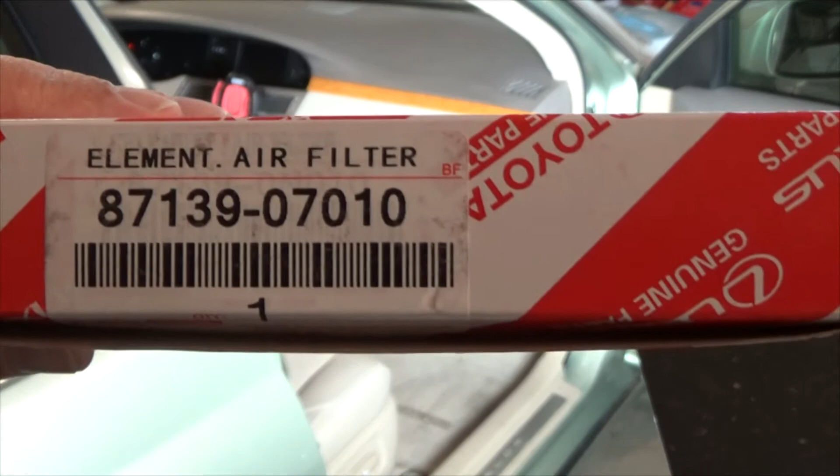87139-07010. Alright, well, I hope it's not a fake one. It says made in Japan. Kind of was expecting made in Taiwan, that's where the oil filters are made.

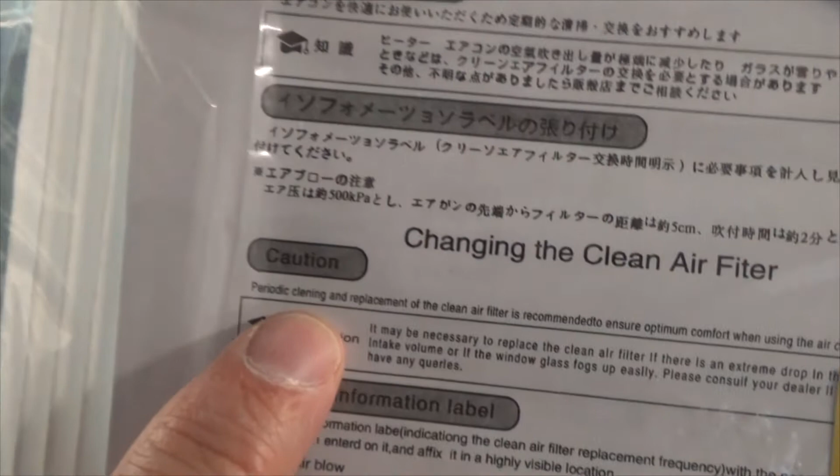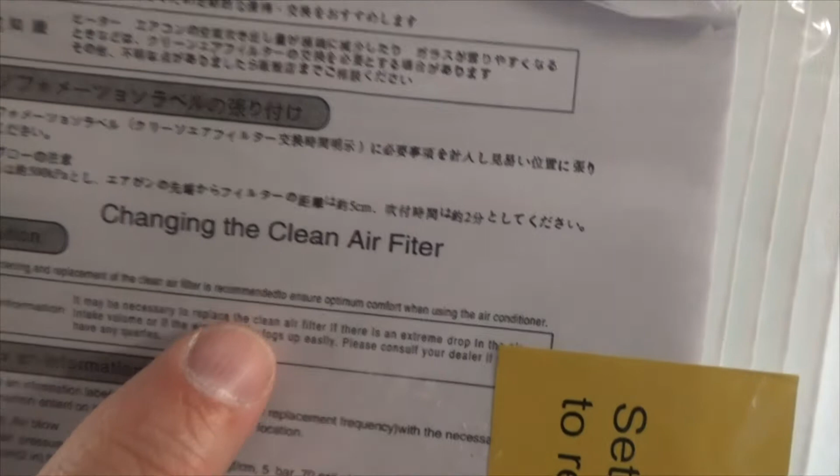But I started to read the instructions, even though I'm a guy and I'm not supposed to. And if you look right here, 'periodic cleaning' - can you see that? It's misspelled. And then 'recommended to,' there's no space there. 'Recommended to' is all one word. So if this is a real Toyota product, bad on them.

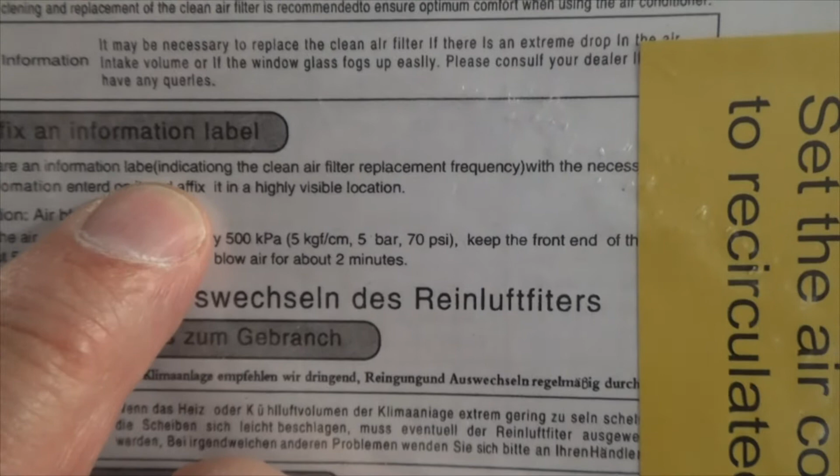Prepare an information label - the L in label before the parentheses is missing. 'Indicating' is misspelled. Oh, this is all bad. This is really bad. Well, I hope it's a genuine filter. Man, that would really suck if I bought a fake one.

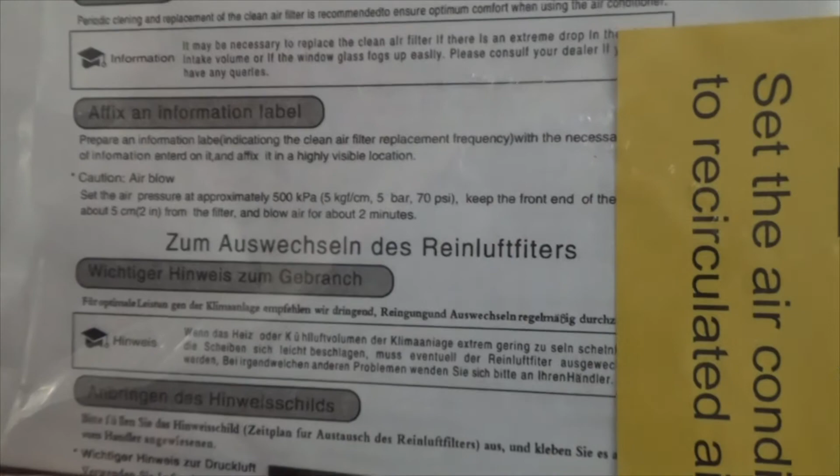Well, I'm going to install it nonetheless. So here we go. I mean, it did come with the labels. And that's supposed to go on the driver's side door by the tire pressure thing. At least that's what the manual says.

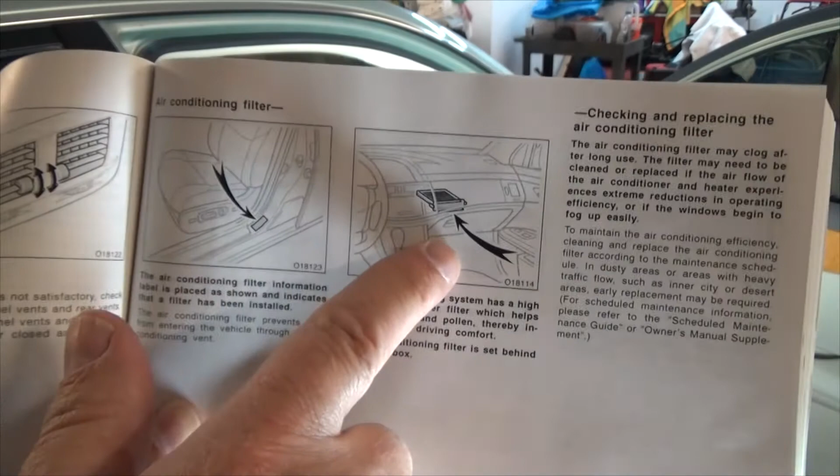So if you look on the manual, it tells you to put the label right there. Then it shows you where the air conditioning filter goes - they call it the air conditioning filter. Then it says, hey, you may need to replace it more often if you notice a reduction in airflow.

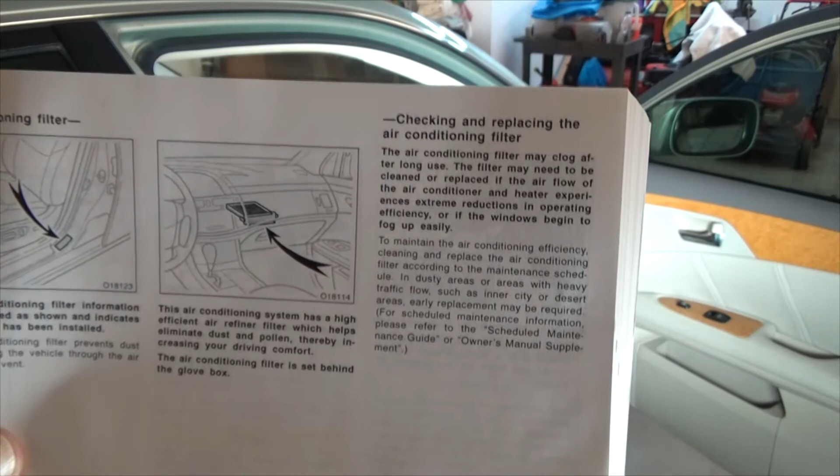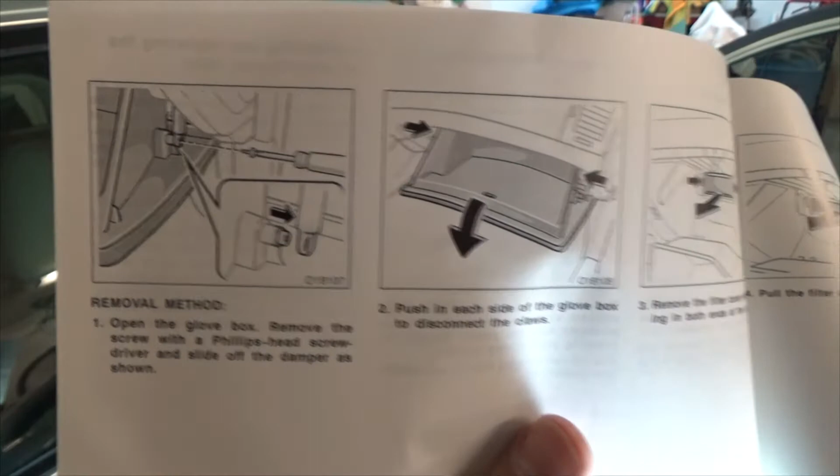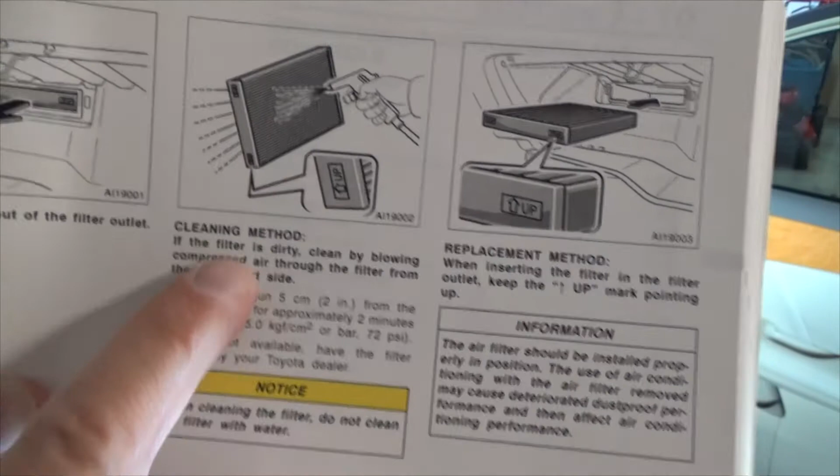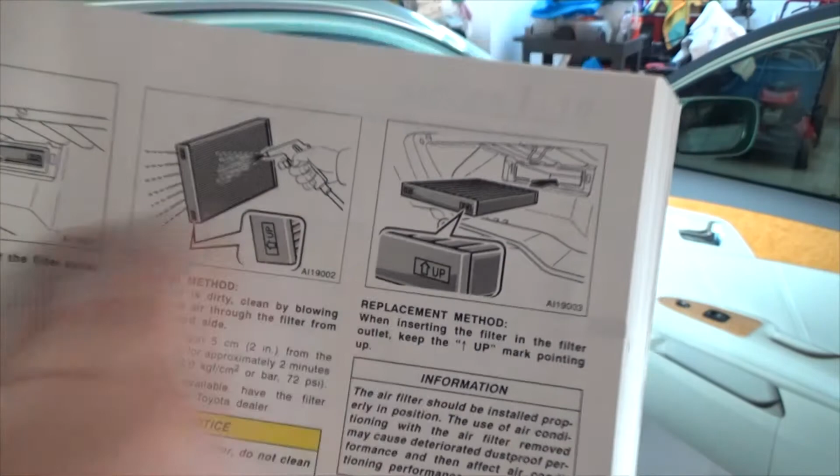Then in your manual there's instructions on removing it, tells you how to do it, and I'll go over that in the video. Alright, now we're going to be pulling out the factory filter, but it doesn't even say replace - after it says pull it out, it tells you to clean it, and it tells you how. If it's dirty, clean by blowing compressed air through the filter from the downward side, and it shows you the up.

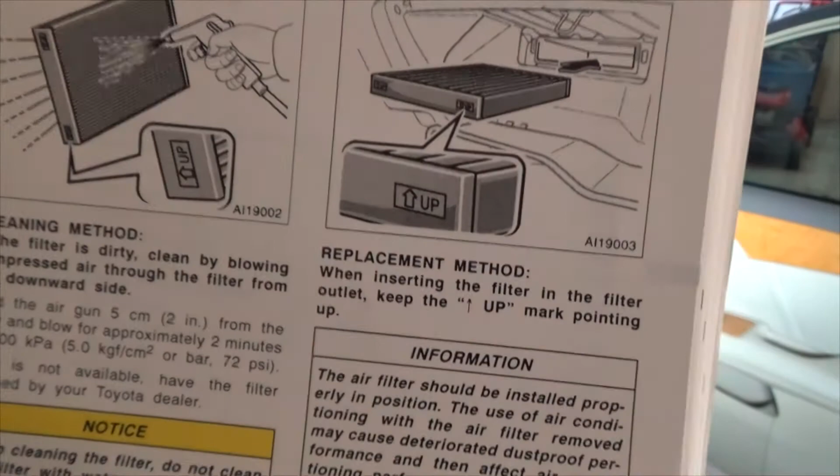So you're going from the clean side and you're blowing out the dirty side. Do not clean with water. And then it says when you replace it, up is up, so be sure the up arrow is pointing up.

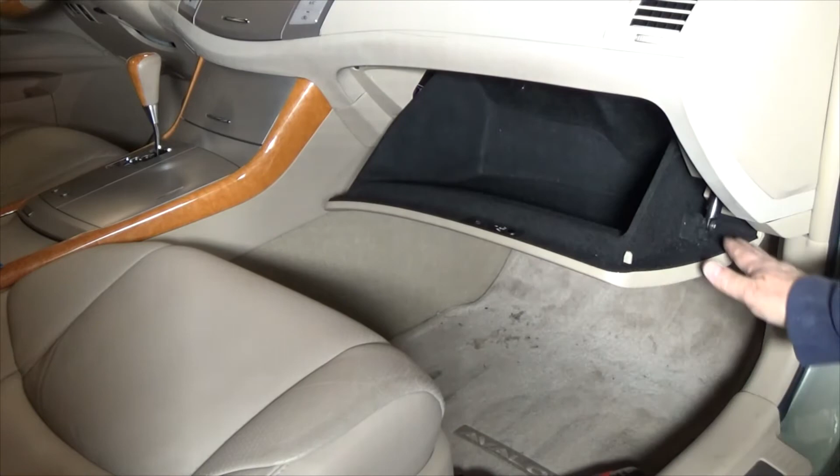Okay, following the instructions in the manual, the first thing we want to do is there's a Phillips screw right here, we're going to remove it off. They're calling it a damper, so we're going to remove the Phillips head screw off the damper.

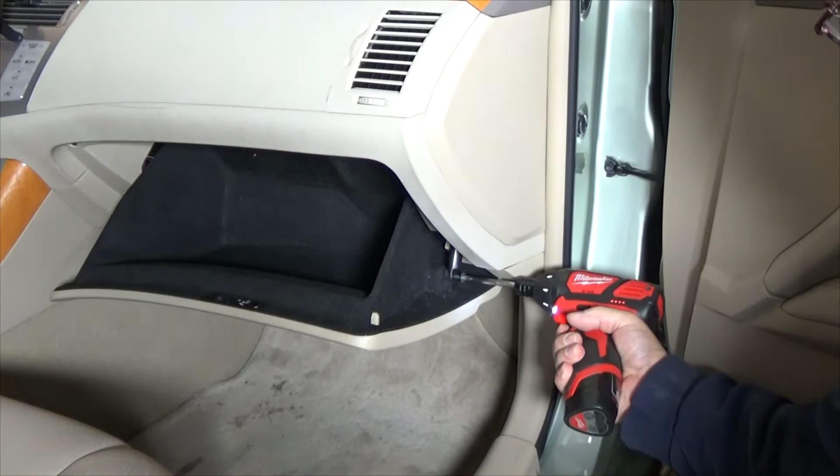Next, we're going to squeeze in both sides, this side and the other side, which puts me in the way of the camera. So what I'm going to do is get out of the camera. And there it goes, dropping down.

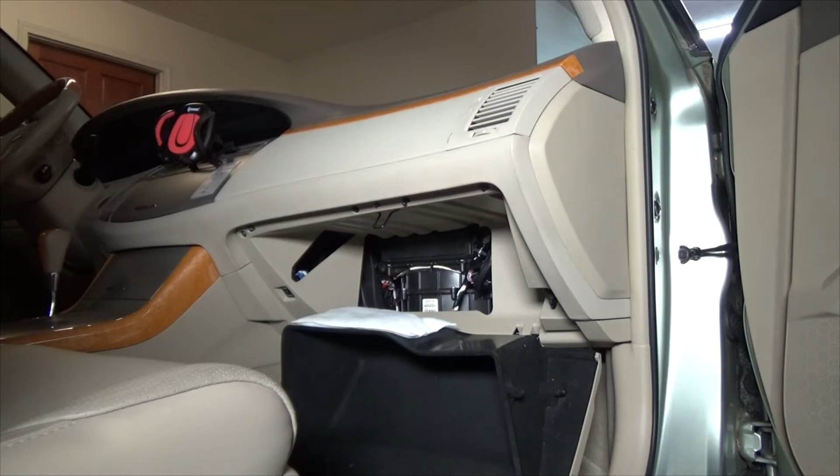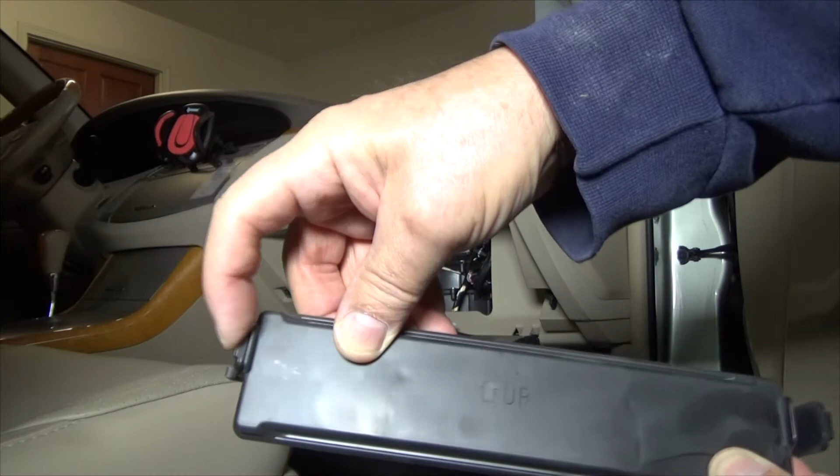Okay, with the glove box disengaged, we are going to remove the panel that's covering the filter right there. Okay, that was very easy. I didn't show it because I would be in front of the camera, but you just push both tabs in, it just comes right off, easy peasy.

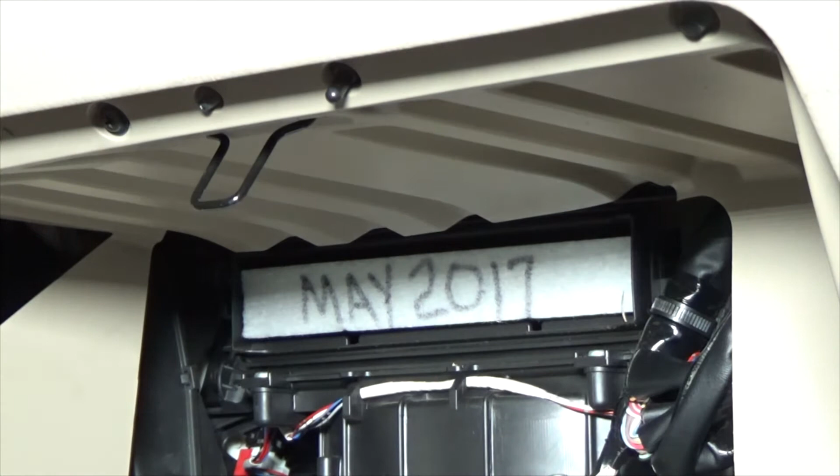And I can zoom back into the filter, and there it is, sitting up there. So it says May 2017, so it looks like I've already replaced it once already because I date my filters. So in May of 2017, and it is now 2021, so it's 4 years old.

So everything was working fine, but because I found so many leaves in the engine air cleaner, I decided to replace this. So here we go. Alright, easy peasy, just reach in here.

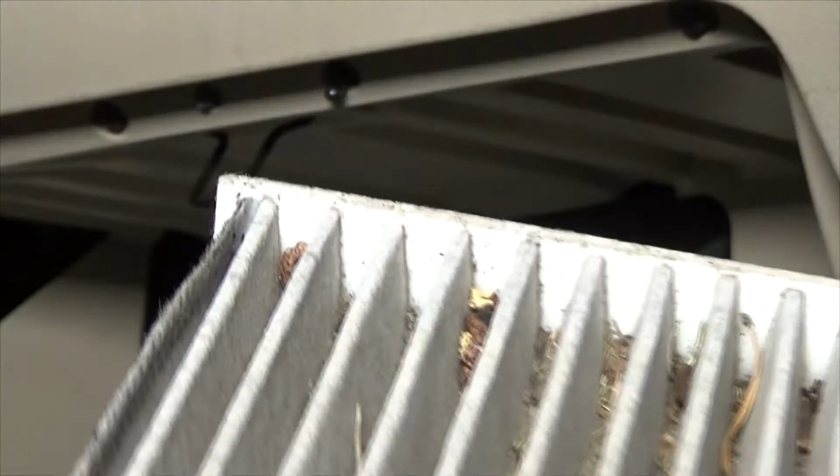You can push on it if you have to get it out a little bit. And I do see quite a bit of debris in there. Quite a bit, so it definitely needs to be changed. This does not look like a charcoal filter.

Let me zoom out. Whoops, wrong way. I don't know how to use my camera.

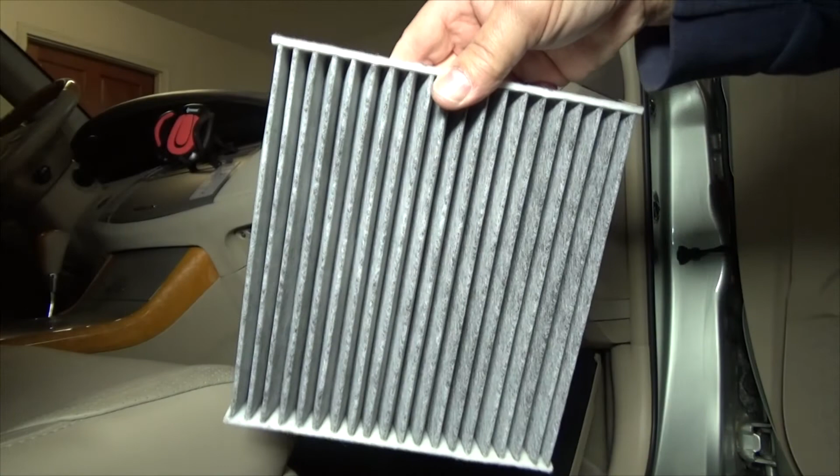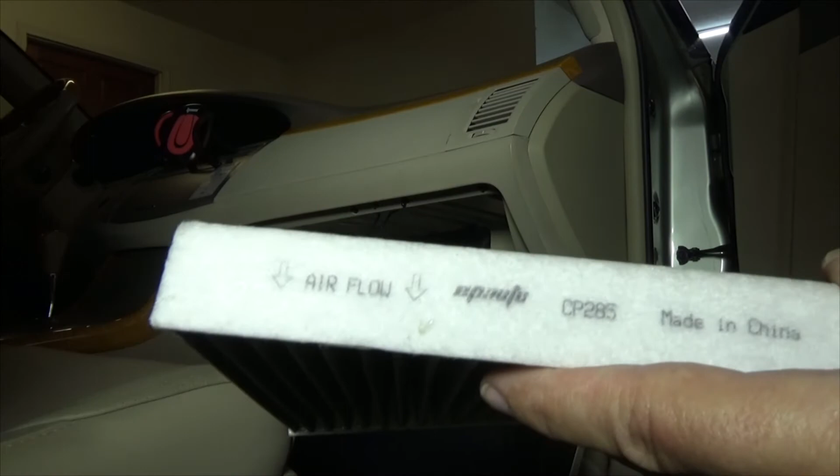As you can see, it looks gray, like a charcoal filter, the fake Toyota filter, airflow, made in China. So it looks like I was cheap and I put it in upside down. It needs to go like this. And it's also not an official Toyota filter.

So let me put the official Toyota filter in there and put it in correctly. Now this air filter that I'm suspicious of says Toyota, has the correct part number, has a manufacturer listed, and says made in Japan. I'm not sure if that's correct.

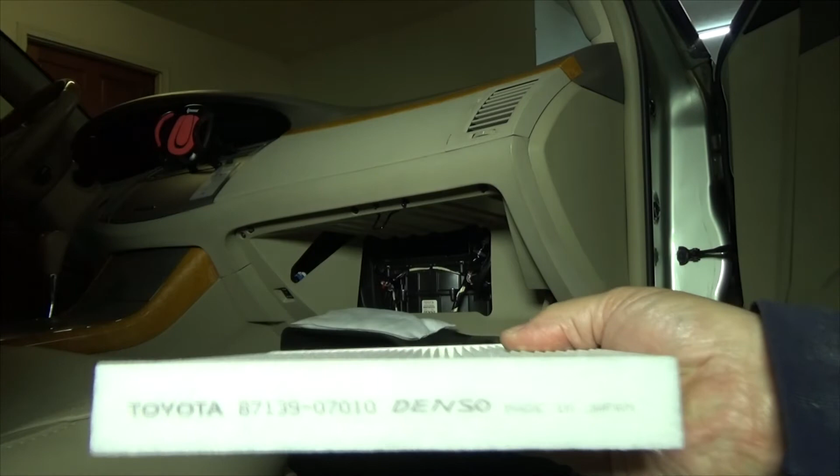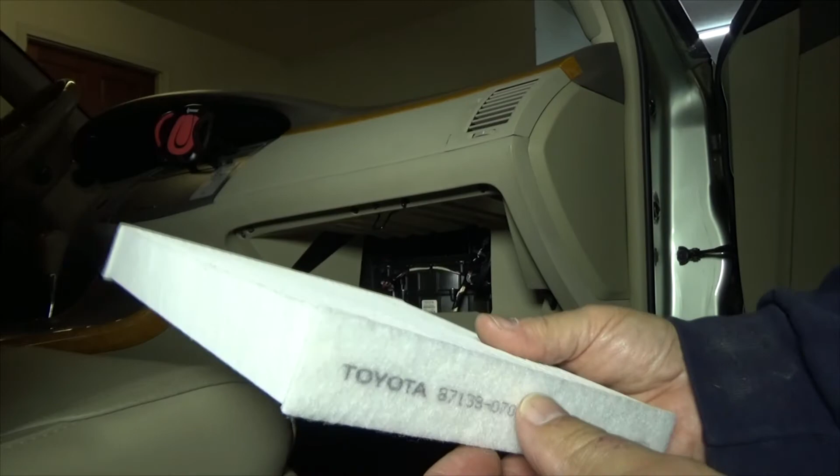And there's nothing on the other side, so there's no airflow indicator on here, no up or down. It's only going to go in this way. This part of the filter goes to the front or the back, and this part goes on the side. You can see the difference a little bit there. And it's not square, so it will not fit in this way. It only goes in one way.

Now you can argue that there is no flow direction. Let me write the date on here. Alright, so I wrote the date on there, and we're going to stick it in here.

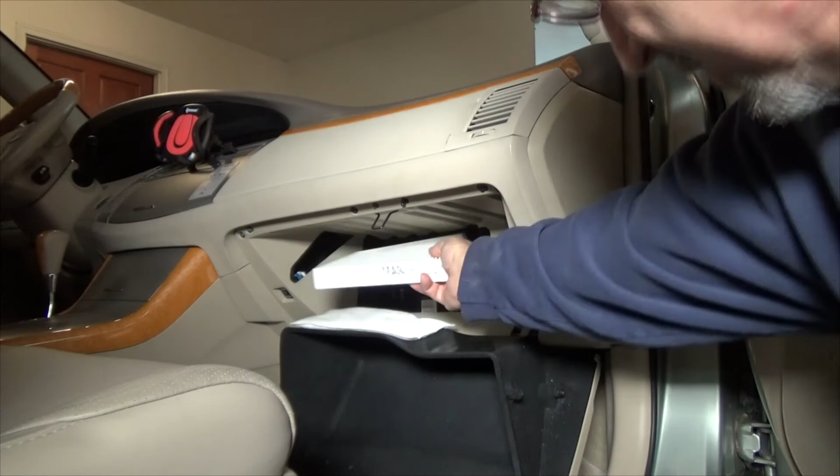See if it'll fit without me messing up too much. Getting in the way of the camera. Putting my hand in front of the camera, fun stuff. Alright, I do see a little dust in there. I'm going to clean that up.

Okay, when I cleaned it up, I did see that it said up, and then I noticed that this is not symmetrical, so it's only going to go on one way. If you try to put it on upside down, it's not going to click into place. So up is up. Let me click it in place.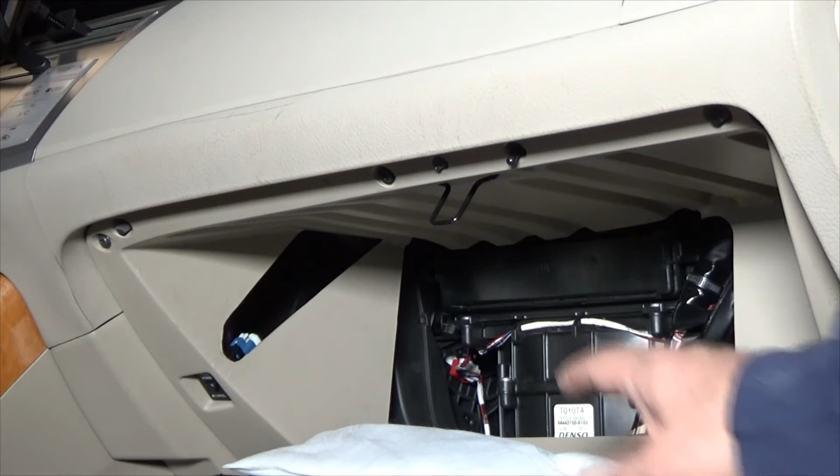Okay, I'm here to tell you it's super easy. It's self-aligned, and then you just press on it. Easy peasy. Next, we'll put the glove box back together here. There you go, it clicks in place.

And we need to line up the dampener, as soon as I find it. Alright, well that dampener retracted, it's up in here, so I've got to grab it and pull it down. I'm going to go get a pick. Alright, I have my pick, and I'm just going to pull it down. It's pretty easy, and I'm going to line it up here.

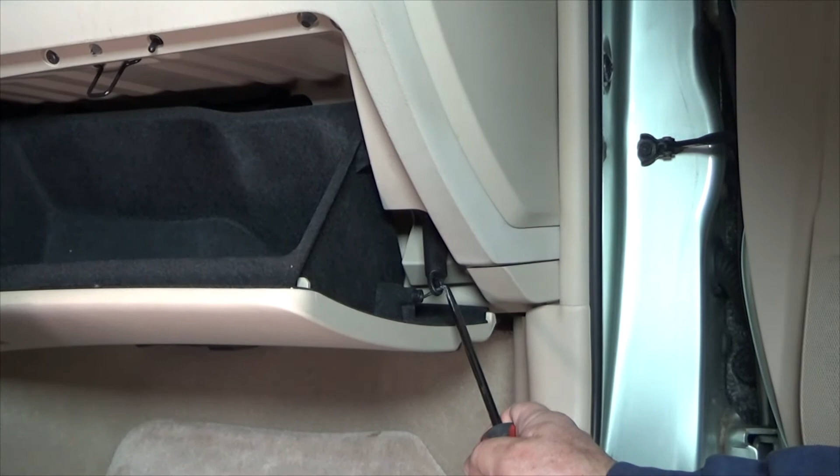Need both hands apparently. Yep, I'm going to hide it, I'm going to hide my work. Line it up, can't see. There we go. Okay, back together, easy peasy.

Now we got to put the label on by the door according to the instructions. Alright, I'm over here on the driver's side, and I really don't see a place for it. We have all these stickers here. I mean, it can fit in there somewhere, I guess. I don't know, it's not really necessary. I could stick it over top of the stickers. Whatever. So, you know, it says clean and replace.

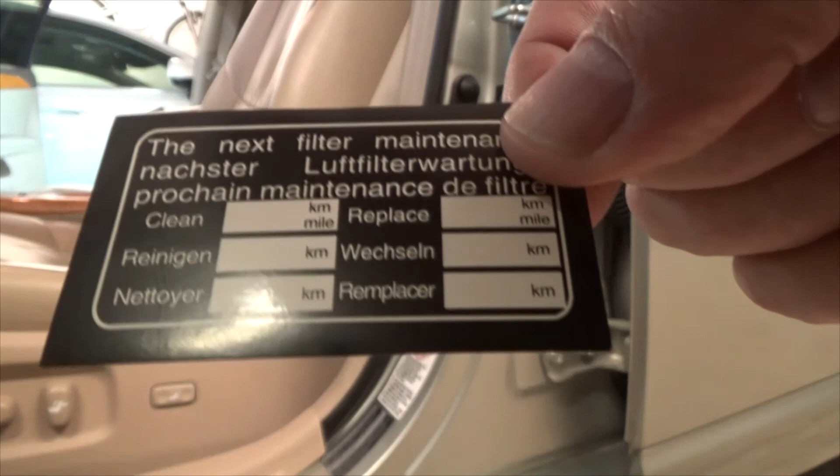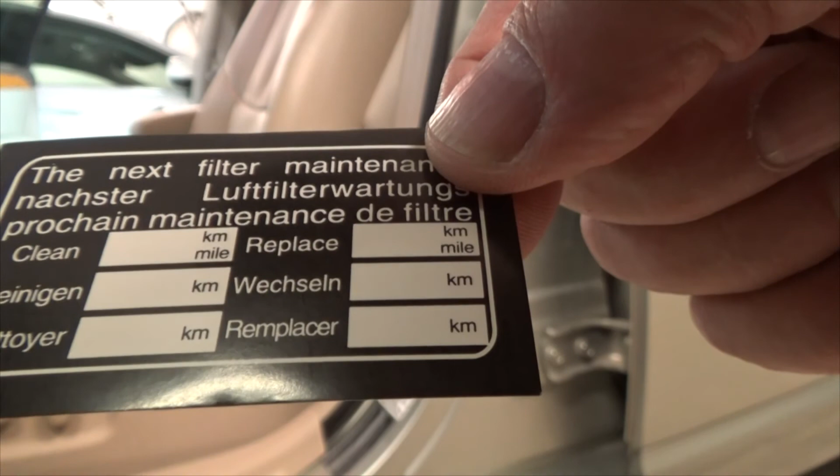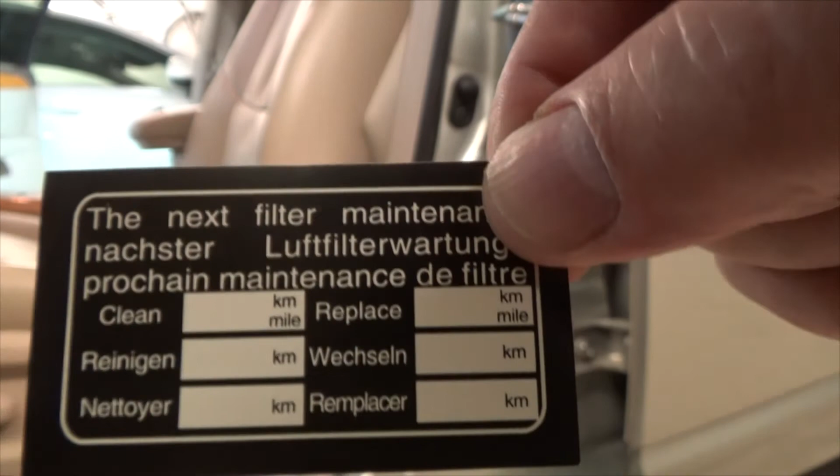I don't recognize the other languages. Well, Luft, I understand Luft is German, so it might be English, German, and I really don't know the bottom language. So anyway, I'm not going to stick it in there. But if you want to put it in here, have at it.

So that's how you install a Toyota AC filter in a Toyota Avalon. Man, that was easy, easy as pie.

So I took out a carbon filter that I had put in there in May of 2017, don't even remember that, and put in a potentially fake filter. I don't know, it didn't have an up arrow. I was expecting made in Taiwan. Maybe it is made in Japan and it's a genuine filter, but I didn't see an up arrow on the filter. So anyway, fun stuff. Be careful what you buy, and thank you for watching.